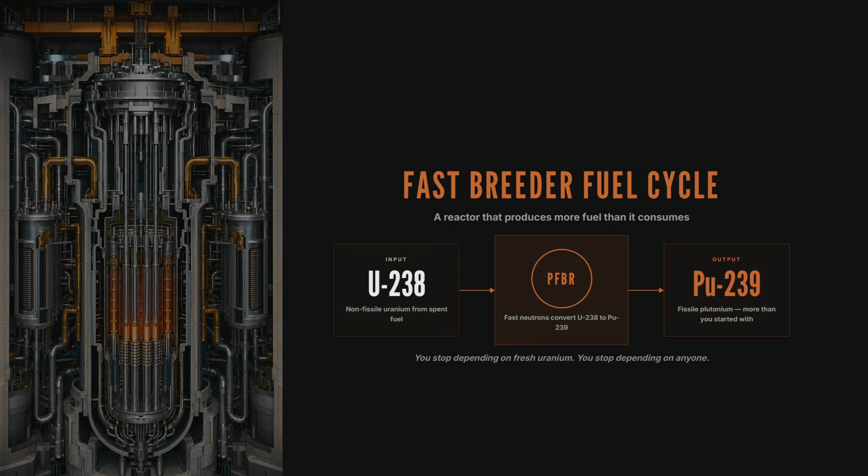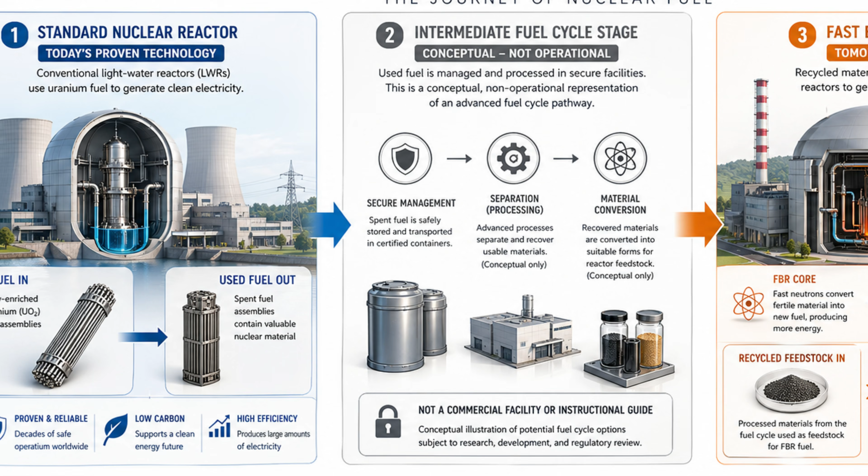Here's what makes the PFBR different from every reactor currently operating here in the US. It produces more fuel than it consumes. Yeah, you heard me. It's not a misprint. A fast breeder reactor takes the spent fuel from a conventional reactor, the material that we call waste, and uses it as feedstock. And as it burns, it converts non-fissile uranium-238 into plutonium-239, a fissile material, usable fuel. Run the cycle long enough and the reactor starts generating more than it started with. You stop depending on fresh uranium. You stop depending on anyone, really.

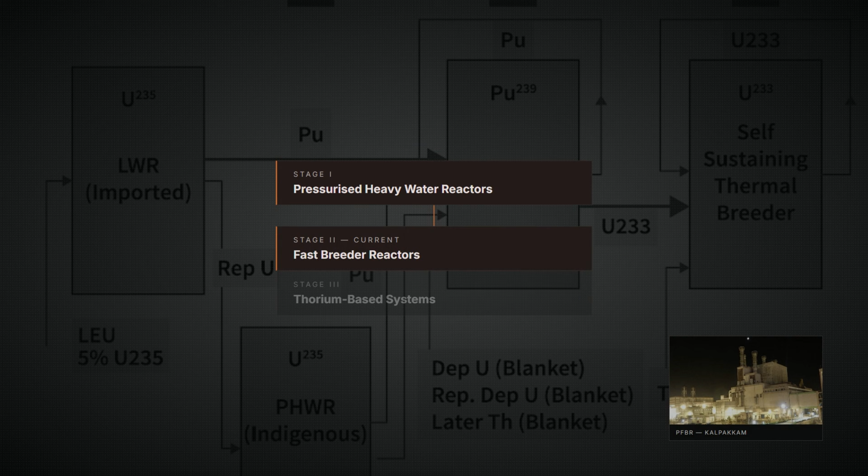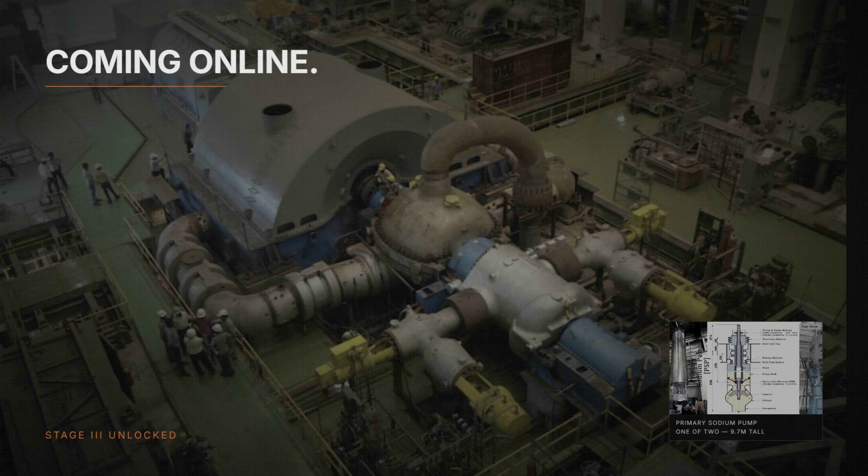And India sits on 25% of the world's thorium reserves. Homi Bhabha, India's first nuclear chief, designed a 3-stage national program in 1954 specifically to reach this point. Stage 1, conventional heavy water reactors to build a plutonium inventory. Stage 2, fast breeders to close the fuel cycle. And Stage 3, thorium reactors running on the fuel the first 2 stages produced. India just completed Stage 2. And they've been executing this plan for 70 years. Now, remember that number because we'll get back to it.

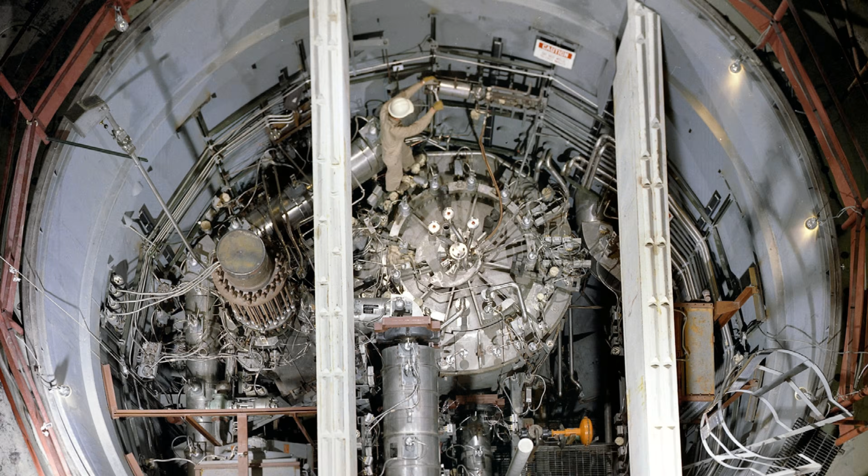But here's what gets kind of insane about all this. India didn't invent this technology. We did. Oak Ridge National Lab, Tennessee, a team of engineers fired up the Molten Salt Reactor Experiment, the MSRE. They ran it for 4 years straight at full operational power. What those 4 years produced, it's not a theory. It's operational data.

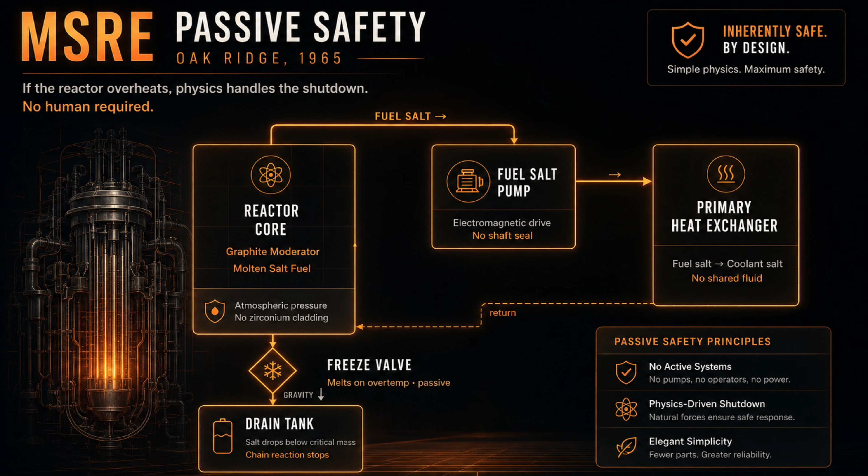Molten salt reactors don't use pressurized water. The fuel is dissolved directly into a fluoride salt coolant. The salt flows through the core, generates heat, moves through a heat exchanger. There's no pressurized vessel, no zirconium fuel rod cladding, no high pressure coolant loop that could rupture, and if the reactor overheats, the salt will drain by gravity into a holding tank below the core. The chain reaction would stop. The reactor would shut itself down. So no operator actions required. No emergency power. No emergency core cooling system.

Like I said, I spent 23 years working inside plants where ECCS readiness was an operational reality. Loss of offsite power drills at 3 a.m., LOCA scenarios. I know exactly what it costs to maintain every system that's designed to prevent the failure modes that the MSRE eliminated. Weinberg's reactor didn't have those failure modes, and the government shut it down. They shut it down because the right answer was the wrong answer for the people making money.

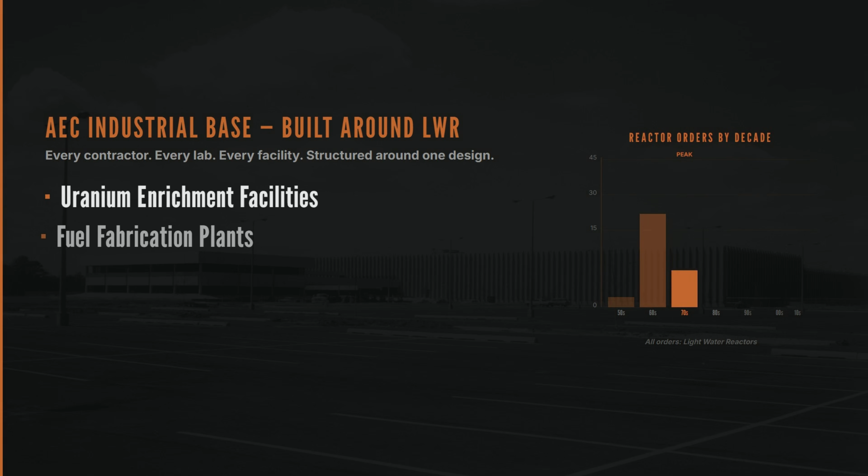Now, here's what's happening in Washington in '72. The Atomic Energy Commission had spent 2 decades building an entire industrial base around the light water reactor: enrichment facilities, fuel fabrication, zirconium supply, pressurized vessels. Every contractor, every national lab, every facility in the country was structured around this singular design.

And Weinberg's molten salt reactor made all of that look like second best. And he wasn't quiet about it. He wrote papers, testified before Congress. He said publicly that the light water reactor was not the optimal path for American energy. And in 1972, the AEC director told him to stop. But he kept going. In October '73, he got the letter on his desk.

Now, the steelman argument for this, and it deserves a fair hearing, is the light water reactor was not a bad design. It was proven. It was buildable at commercial scale. It had an operational track record. And the MSRE had only run at research scale. And scaling an experimental design to commercial operation is pretty extensive and sometimes uncertain, and the AEC was not wrong to want a proven technology.

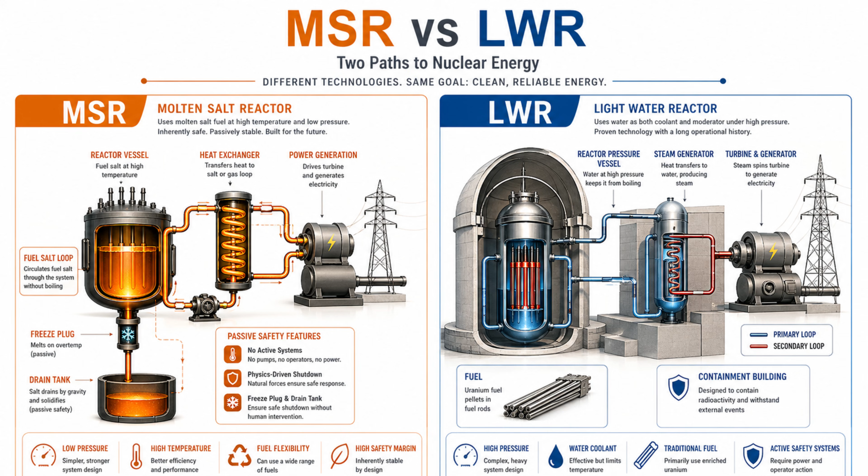But there's a difference between we need more time to develop something and we are going to shut it down, defunding, terminating, especially the scientists who built it. They didn't pause the program, they killed it. And there's also the fact that light water reactors produce plutonium-239 as a byproduct, weapons grade. In '73, that was not a disadvantage in DC. The molten salt thorium cycle does not produce weapons grade material. They fired the man who built a reactor that could not make a bomb for them in favor of one that could. Washington special.

So while the MSRE program sat in a filing cabinet, other countries like India were reading our published research. We published it. It was public. China, they launched a formal molten salt reactor program in 2011. Their TMSR at Wuwei achieved its first operational test in '23. India, well, they executed Bhabha's 70-year blueprint exactly as written.

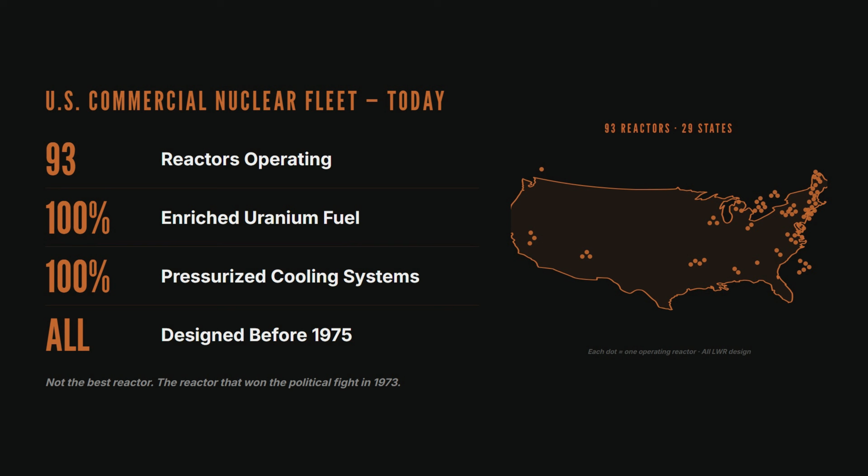Right now, the U.S. operates 93 commercial nuclear reactors, and every one of them uses enriched uranium. Every one of them has a pressurized cooling system. Every one of them was designed using technology finalized before 1975. It's obvious, folks, we're not running the best available reactor. We're running the reactor that won the political fight.

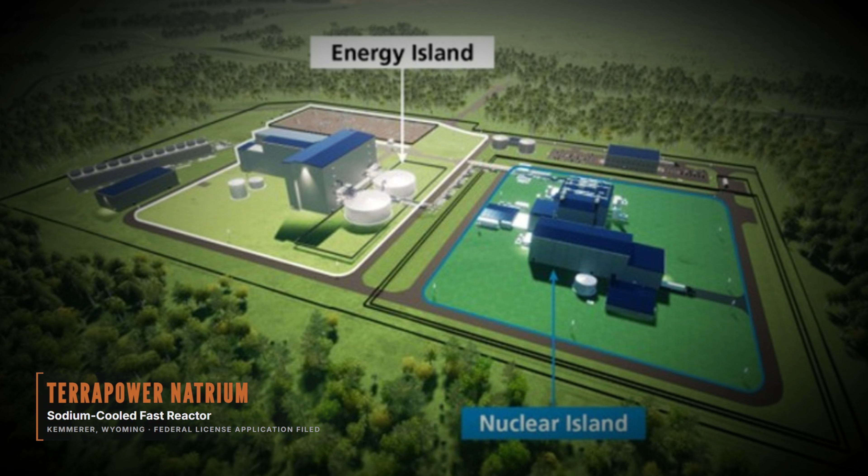Remember the number from the beginning. 4 years of clean operational data at Oak Ridge. No meltdown, no loss of coolant, no pressurized vessel failure. India kept that number. We put it in a drawer. Now, I want to be direct about all this. The engineering knowledge is not gone. It's in the people. The NRC is currently reviewing advanced reactor license applications for the first time in quite some time. TerraPower, well, they're building a sodium-cooled reactor in Kemmerer, Wyoming, with a federal license application that's on file. The window's not closed, but the gap is real.

Now, India, they're running a reactor from a program designed before most of their engineers were born. China read our research and already built it. And we are still running the technology Weinberg wanted to replace. I know what the people inside this industry can do, folks. This country produced Alvin Weinberg. It produced the MSRE. It produced the technical knowledge that 2 other countries used to get ahead of us. The question is not whether we can build a better reactor, because we've already done that. The question is whether Washington will get out of the way long enough to let America build again.

October 1973, Alvin Weinberg walked out of Oak Ridge with a termination letter. He was right. They knew he was right. They fired him anyway.